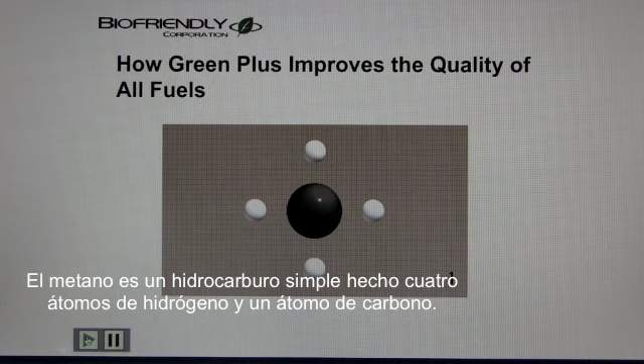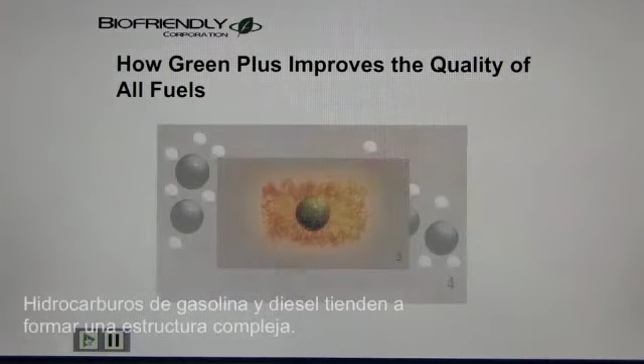Combustion is brought about by a chemical reaction between the carbon and hydrogen in fuels and the oxygen in the air. With a simple hydrocarbon, such as methane, this reaction produces mainly water and carbon dioxide, and very little pollution. However, gasoline and diesel hydrocarbons tend to form a more complex structure.

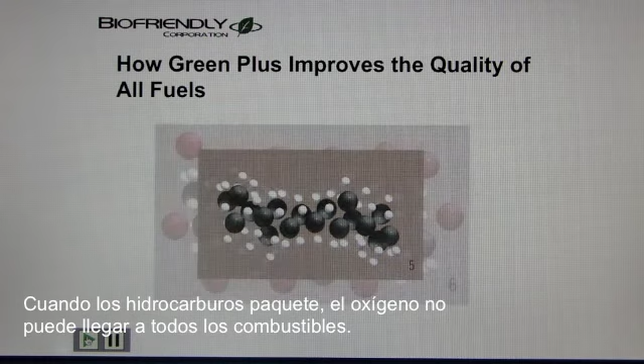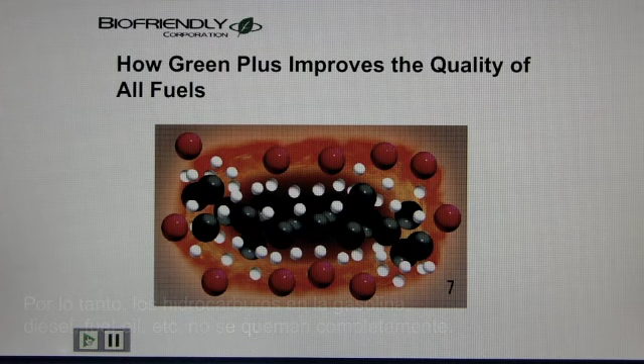Unfortunately, these hydrocarbons tend to get bundled up with one another, creating clusters. When hydrocarbons bundle, oxygen cannot readily reach all the fuel molecules. Therefore, the hydrocarbons in gasoline, diesel, fuel oil, and the like do not burn completely. The result of this incomplete burn is toxic exhaust. These partially burnt molecules contribute to pollution.

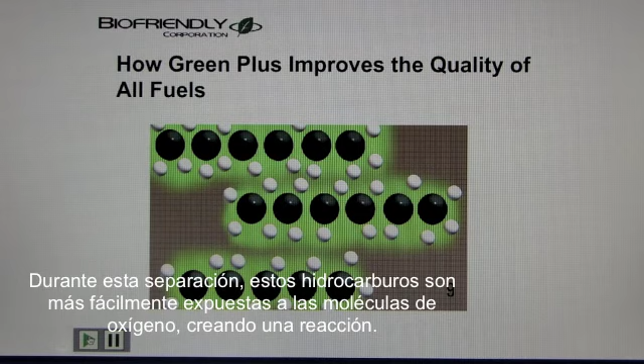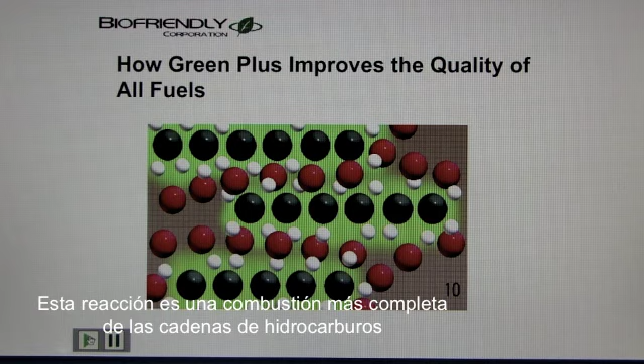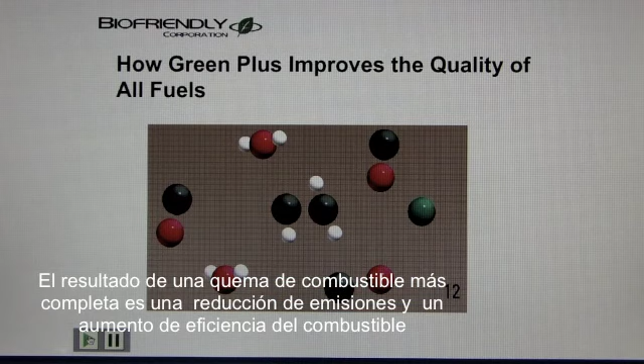With the addition of Green Plus, this chemical reaction is enhanced, first, due to a slight unbundling-like action on these hydrocarbon chains, then, due to the fact that these hydrocarbons are more readily exposed to oxygen molecules. The reaction that follows is a more complete burn of the hydrocarbon chains. The result of a more complete fuel burn is the reduction of emissions and increased fuel efficiency.

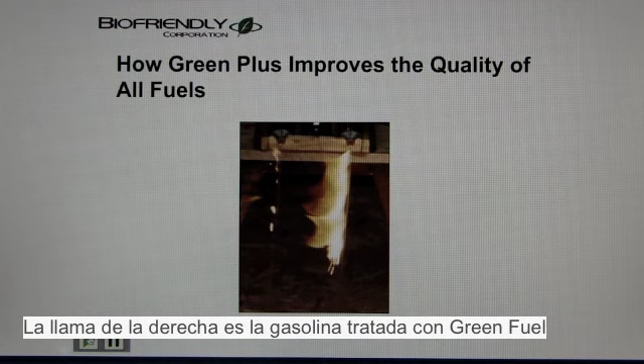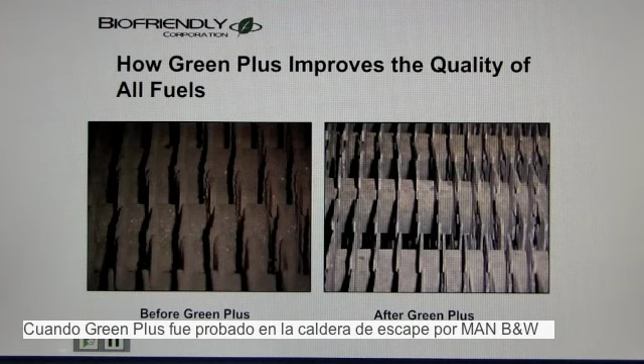This simple burn test shows how Green Plus can enhance the chemical reactions in fuel. The flame on the right is gasoline treated with Green Plus. The flame on the left is untreated gasoline. When Green Plus was tested on an exhaust gas boiler by MAN B&W, soot deposits were found to burn away.

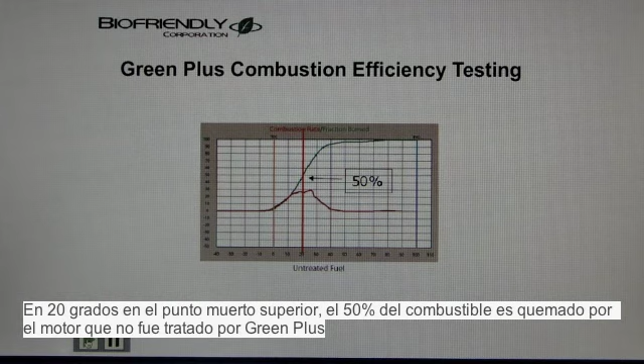By 20 degrees from top dead center, 50% of the fuel was burned by the engine that was untreated with Green Plus. But when the engine was treated with Green Plus, 86% of the fuel was burned by the time the piston had moved 20 degrees from top dead center.

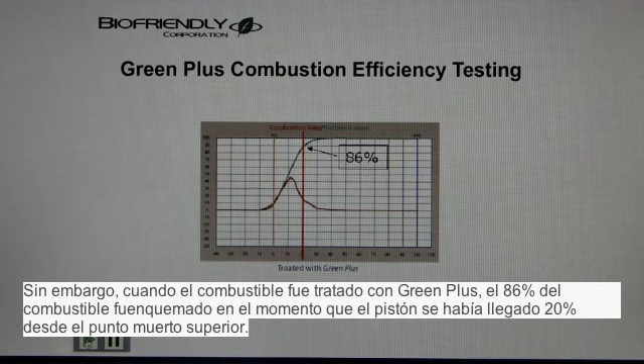When comparing the engine while treated with Green Plus, on the left, with the engine while untreated, on the right, one can clearly see that on the treated graph, the red line, which indicates engine pressure, comes to its apex sooner and more completely, then dissipates at a much smoother, steadier rate.

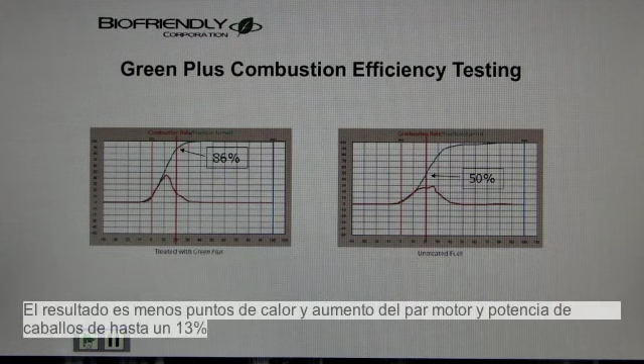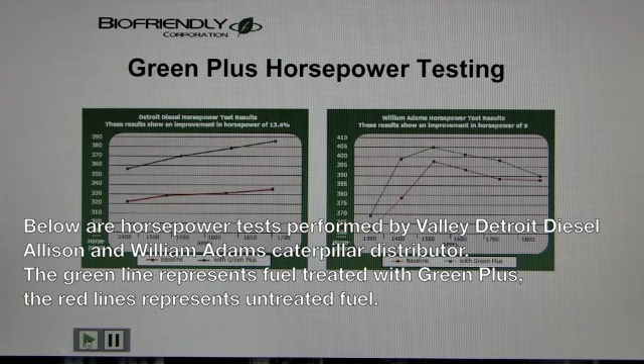This rapidly progressing, smoother burn indicates an increased thrust on the engine pistons closer to top dead center. The result of this is less hot spots and an increase in torque and horsepower of up to 13%. Below are horsepower tests performed by Valley Detroit Diesel Allison on the left and Caterpillar distributor William Adams on the right. The green lines represent fuel treated with Green Plus. The red lines represent untreated fuel.

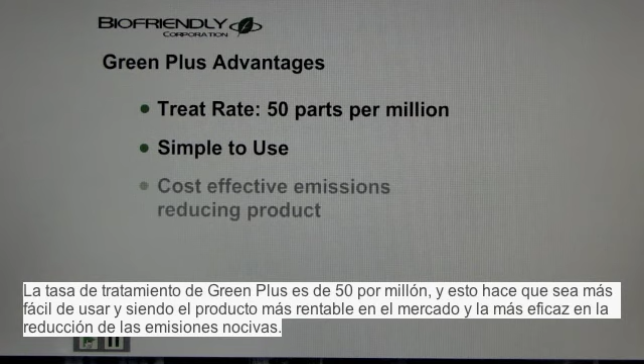Green Plus works at the molecular level to cause a catalytic-like action in fuel. Because of how it works, Green Plus's treat rate is only 50 parts per million. This makes it very simple to use and the most cost-effective emissions-reducing product on the market.